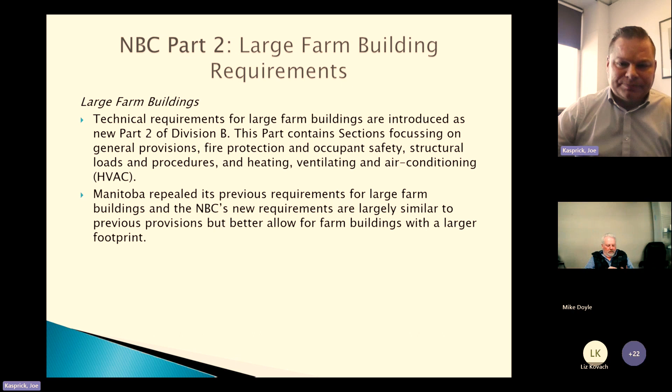Within Part 3, we see the introduction of encapsulated mass timber construction, a new construction type known as EMTC. It enables construction of wood buildings up to 12 stories, which could be perceived as a large jump, considering we're going from 2010, where in 2015 there was the introduction of 6-story wood frame construction. Manitoba never got to adopt that. So we're really jumping into higher rise buildings made of wood frame construction. There's also mid-rise combustible construction, with requirements to increase the design options for mid-rise.

The requirements that 25% of the building perimeter be located within 15 meters of a street, and it may be reduced to 10% if certain criteria are met. So when we see wood frame construction used in high-rise buildings, typically a lot of the provisions are put into the grade heights as well as the location to a street, and that is specifically to do with firefighter access.

Considering the type of construction being used being combustible, you want to make sure that firefighters have access to this building in a ready fashion, as well as there's requirements that are put into the fire code that are dealing with the construction of these buildings while they're being constructed.

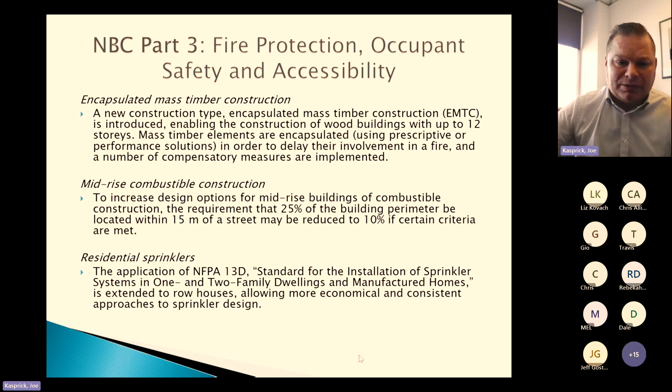We also see the application of NFPA 13D, that's sprinklering, from 1 and 2 family dwellings being extended to row housing. And this would allow for more economical and consistent approaches for sprinkler design. Fire alarm systems is increased by requiring low frequency audible signals in sleeping rooms, as well as visible signals in public corridors, washrooms, and at least 10% of guest suites in hotels and motels.

The safety glazing requirements reduce the hazard imposed by wired glass. Safety glazing is required in windows and doors where human impact is possible. In assembly occupancy, safety glazing is also required in shower and bathtub enclosures regulated by Part 3 and Part 9.

The purpose of that is obviously that if you have glass used in a means of egress or in a space like a washroom, you want to ensure that the safety glazing requirements are met in the event that the glass is impacted or busted, so that it doesn't pose a safety risk to the occupants, causing further injury.

The accessibility of buildings is improved by revising the minimum dimensions of building elements to accommodate persons using various types of mobility devices, and by increasing the visibility, detectability, and ease of use of building elements by persons with reduced dexterity, vision, and/or hearing.

Requirements are introduced for universal washrooms, shower rooms, for visible and audible feedback signals, and for tactile safety signage. More pedestrian entrances and floor levels are required to be accessible. So one of the things that Manitoba has done when it comes to accessibility: previously, for those who worked in the design or supplying things for accessibility, all the requirements were Manitoba specific. They were written in what we would call our amendments, which is within the regulations that adopt the codes.

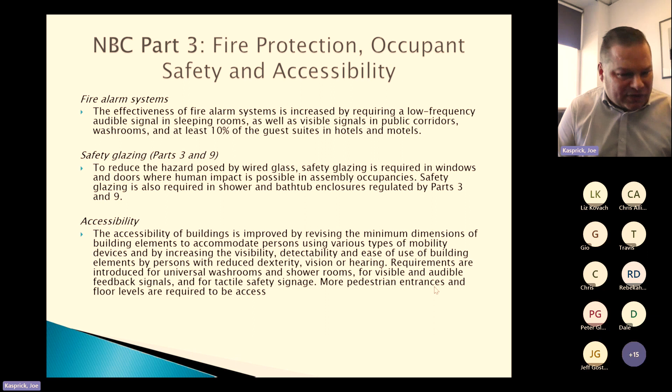And so to move away from that, we've aligned more with the national code, as we feel the national code has really caught up to where Manitoba was at, while also ensuring that there aren't trade barriers if we have specific measurements only in Manitoba when we're talking about door sizes and such. Part of alignment with the national code is ensuring that for market providers, these materials are used across Canada and not specifically just in certain jurisdictions, which we may have seen previously with certain dimensions of doors and such.

However, in 2010, it was under consideration as the data that was provided was more specific to Manitoba. And then with the review of the 2015, the Building Standards Board, with support of the Engineering Association, made the decision that Manitoba should be adopting the seismic values as they are reflective of actual studies done by the National Research Council for areas within Manitoba.

Just because there are seismic values does not necessarily mean that they play a factor in the design of the building, but they are things that need to be considered by the designers themselves, such as the structural engineers, but they may not govern the design. So from our understanding, seismic really only plays a role in what we call post-disaster buildings. These are buildings that by definition are required to be in place in the event of a disaster.

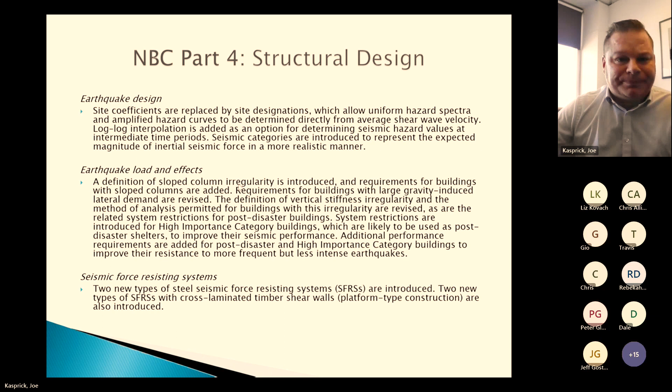So what we see for solar panels, there's procedures based on guidance from the structural commentaries user guides introduced for the determination of wind loads on roof-mounted solar panels to ensure that these additional wind loads are accounted for in the design of the building structure. Procedures are also introduced for the determination of snow loads on roofs and solar panels, as the installation of solar panels affects the quantity and distribution of snow on the roof.

This has been a hot topic for years now, where panels are placed on roofs that may not have been designed for them on existing buildings, or even in proposed buildings, and how the distributed loads affect the building. So the code has sort of caught up to what we're starting to see as common practice now with the placement of solar panels on buildings.

Procedures are introduced for the determination of wind loads on canopies attached to low buildings, on parapets, and on balcony guards near the roof to ensure that these additional loads are accounted for in the design of the building.

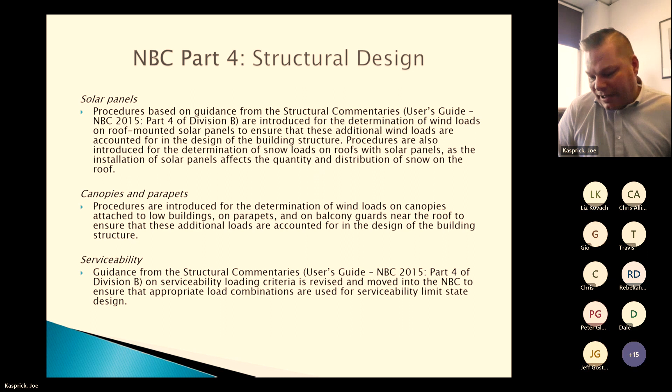Serviceability: there's guidance from the structural commentaries on serviceability loading criteria, revised and moved into the NBC to ensure the appropriate load combinations. Some of these things may or may not be of important information to the group as a whole, but I don't ever want to make that decision. So I usually keep in everything that we've seen as highlighted changes to the code in the event that it may or may not affect you, but typically Part 4 affects structural engineers.

There's new material standards that are applicable for environmental separators and assemblies: for asphalt-coated glass-base sheets, standard specifications for application of exterior gypsum panels, as well as standards for flat wall insulating concrete forms. Air leakage requirements are also revised and performance classes established.

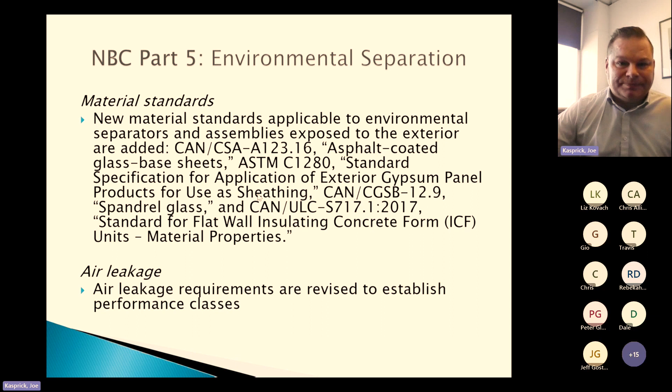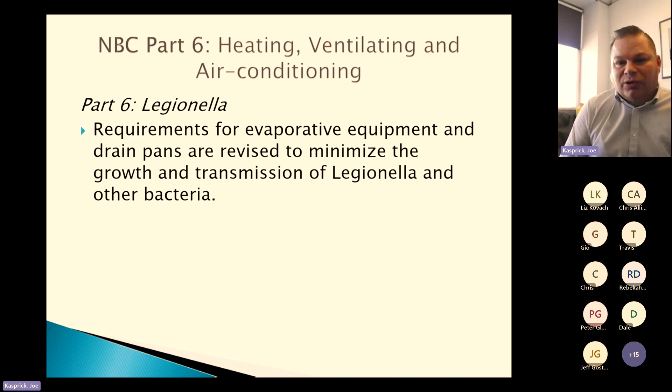In Part 6, there's introduction of Legionella. Requirements for evaporative equipment and drain pans are revised to minimize the growth and transmission of Legionella and other bacteria.

When we get into Part 9, housing and small buildings, the protection of windows, there's a requirement to minimize the risk of falls through windows. Requirements for the protection of openable windows in residential occupancies are strengthened by removing exemptions related to dwelling type and window opening size, increasing the minimum sill height for unprotected windows, and prescribing more reliable control mechanisms.

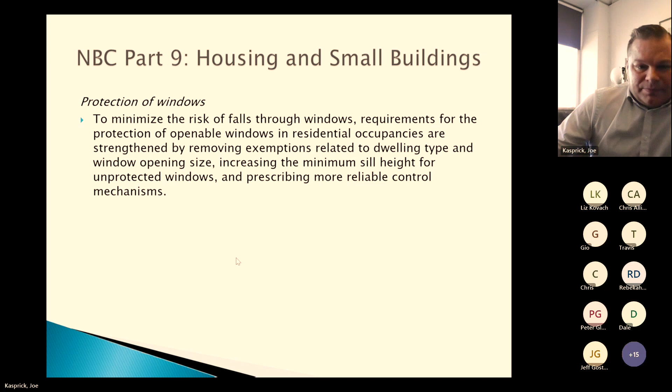There's also an introduction of home type care occupancies. In Manitoba, we would have referred to these as residential care occupancies, or B4 occupancies. Manitoba introduced these in 2016 to allow for care type occupancies in the residential setting. Through studies and works from the working groups, the National Research Council has introduced their classification now of home type care occupancy, which Manitoba has adopted, as well as carried over existing provisions that we used to have for when a building is being retrofitted, so an existing dwelling.

So the provisions for a new home type care occupancy are introduced to allow for safe and affordable care in a home type setting. They're similar to Manitoba's previous framework, allowing for smaller, 4 or less residents in unsprinklered housing, but with several key differences. The house must be a detached house, no side-by-sides or row housing. Sleeping accommodations for residents must be on the first story only. And there's stricter egress requirements on the first story, including requirements for 2 remotely placed means of egress on the first story to be barrier-free and exit at grade, or be provided with a ramp.

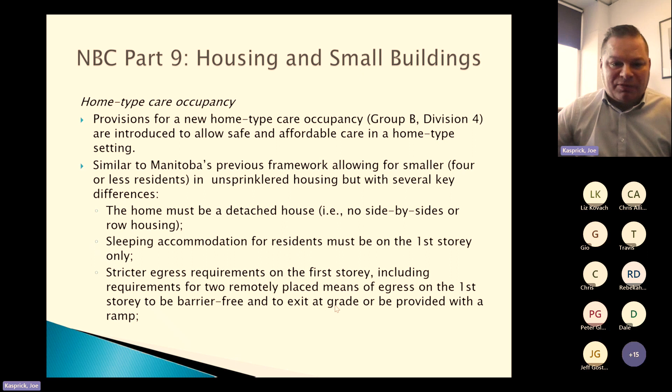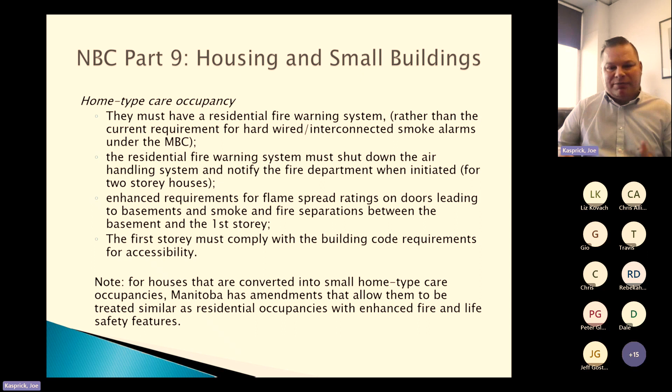They must have residential fire warning systems rather than the current requirements for hardwired interconnected smoke alarms. The residential fire warning system must shut down the air handling system and notify the fire department when initiated for 2-story houses. Enhanced requirements for flame spread ratings on doors leading to basements and smoke and fire separations between the basement and the first story. The first story must comply with the building code requirements for accessibility. Please note, for houses that are converted into small home type care occupancies, Manitoba has amendments that allow them to be treated similar to residential occupancies with enhanced life safety features.

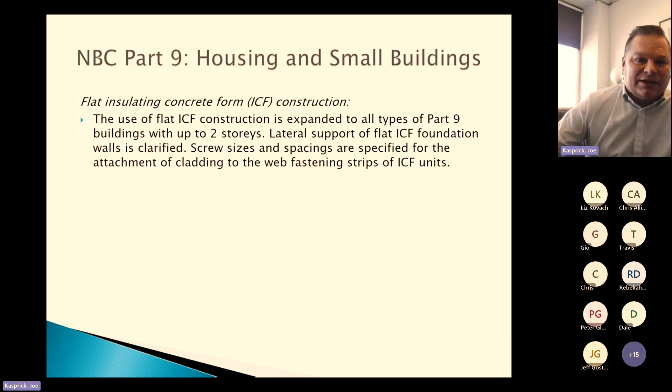The use of flat ICF construction is expanded to all types of Part 9 buildings with up to 2 stories. Lateral support of flat ICF foundation walls is clarified. Screw sizes and spacings are specified for the attachment of cladding to the web fastening strips of ICF units.

9.36, which is energy efficiency for housing and small buildings. There's a tiered performance compliance. A performance compliance path is established with 5 tiers, each successive tier being increasingly stringent in terms of house energy consumption and heat loss. In addition, a prescriptive compliance path based on energy conservation points is provided for Tier 2. Manitoba has adopted and enforces the baseline of Tier 1.

Manitoba is currently still committed to providing a roadmap and developing future steps in the adoption of higher tiers once proper consultation and stakeholder engagement has been conducted, including market readiness and training. So currently where we're at is Tier 1. However, the department is still working on looking at what the advancements to the tiers may look like in the future. So stay tuned for that information.

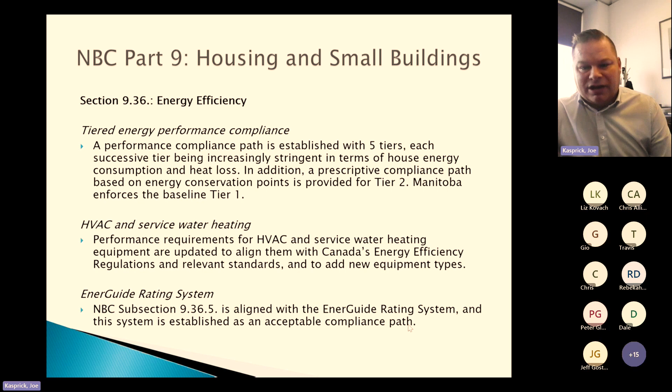HVAC and service water heating. Performance requirements for HVAC and service water heating equipment are updated to align them with Canada's energy efficiency regulations and relevant standards, and to add new equipment types. The EnerGuide rating system in subsection 9.36.5 is aligned with the EnerGuide rating system, and this system is established as an acceptable compliance path.

In the NECB, which is the National Energy Code for Buildings, which applies to large or complex buildings, typically Part 3 buildings or larger Part 9 buildings of business and personal service or industrial occupancy. The application of the NECB is extended to cover alterations, such as a tenant improvement, to buildings originally constructed in accordance with the code. So in the past, the energy code was exempted from existing buildings.

However, a good example would be if I had a building that was constructed to the 2010 or 2011 National Energy Code, the energy code would still apply to that existing building now. Before, the wording would have exempted them as existing buildings.

Pardon me, I had to sneeze.

So it had this loophole previously designed in the framework of the code that I could design my building, I'd have to meet the energy code. However, when I went to renovate it, the energy code didn't apply to my building. So you can essentially take your building to less than code after it was built to code, which kind of defeats the purpose. Whole building air tightness testing is introduced as an option, not a mandatory requirement, for complying with air leakage requirements.

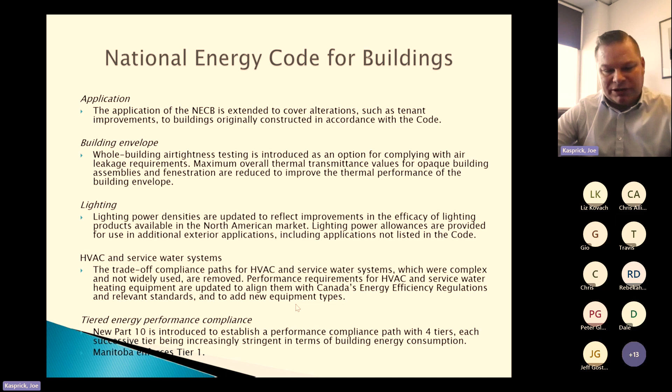Under the National Plumbing Code, fibre-cement pipe and fittings are included as alternatives to asbestos cement materials, which were removed from the 2015 NPC. Other new plumbing materials are added as options, including polyethylene of raised temperature (PE-RT) tube, cellular core polyvinyl chloride (PVC) pipe, and their fittings. The maximum temperature for water discharging from shower heads or into bathtubs is reduced in healthcare facilities and seniors' residences to prevent scalding. Gate valves and screw caps, which require manual intervention, are removed as options for backflow protection to reduce the risk of basement flooding.

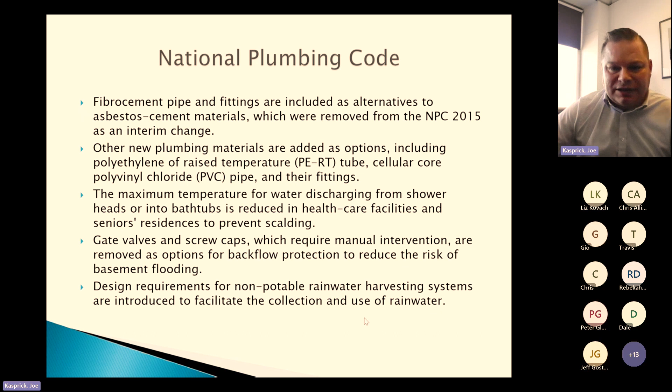Design requirements for non-potable rainwater harvesting systems are introduced to facilitate the collection and use of rainwater. In 2015, the National Plumbing Code introduced water use efficiency requirements for supply fittings, shower heads, water closets and urinal plumbing fixtures, which vary from Manitoba's amendments under the Manitoba Plumbing Code. So previously, Manitoba was ahead of the national by introducing efficiency requirements for fixtures. However, the national has finally caught up, and Manitoba has decided to align with the national.

So what you see here is what the requirements used to be under the current MPC. And then these are what the new requirements would be. And on this far right column, you'll see the variances on what those changes are.

So one of the biggest ones you'll see is we used to have a pre-rinse spray valve requirement, and we've removed that. We used to have a laundry tub faucet requirement. Those are removed. Shower heads will increase in flow. Kitchen supply fittings, there's a small decrease, but by aligning with the NPC, it should make it easier for industry to supply products that don't have specific Manitoba requirements once again.

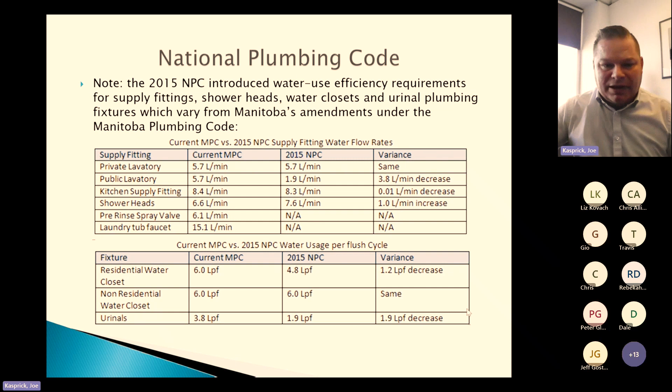When we're looking at the current MPC for residential water closets, it used to be 6 liters per flush. It's down to 4.8 liters per flush. However, in non-residential settings, it stays at 6. And then in urinals, they go from 3.8 to 1.9. That's really my quick highlighted changes.

I didn't dive into the technical weeds of stuff, as it's very difficult to provide a code update. So when we look at code changes, just from 2015 to 2020, and I have Jeremy with me on this call, who's one of our great policy analysts that does a lot of the work in the shadows with me, there were 4,800 pages alone that we'd have to read through of technical changes. So when it comes to providing updates on what the changes are, it's difficult to cram that into an hour. So that's why we figured we'll give a very quick highlight.

And I'm going to stop sharing my screen. A very quick highlight of what the key changes are, but also allow us to make ourselves available for a Q&A if there are those types of questions that either we can respond to right now, or we can provide a response through the WRLA. But thank you.

Well, that's great. Thank you so much. So we're going to open up the floor now for questions. I know that some of the folks on this call had some questions about interpretations before. I'm not sure if they've had some of those answered, but now is a really great time to start asking some of those questions that may be impacting your team as you're working with contractors or even just on various plans. So now as we wait, because I'm not sure if we're going to get any questions. We usually don't have a shy group.